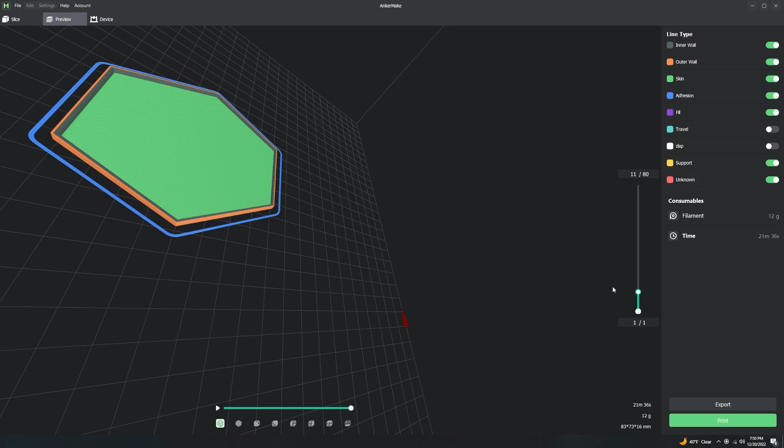So with infill, guys, everything that you're 3D printing is essentially hollow, except the infill is a certain percentage of material on the inside. So if you want 0% infill, what you're gonna get is literally a completely hollow object. There's nothing on the inside. And then guys, come back up here to the slice tab.

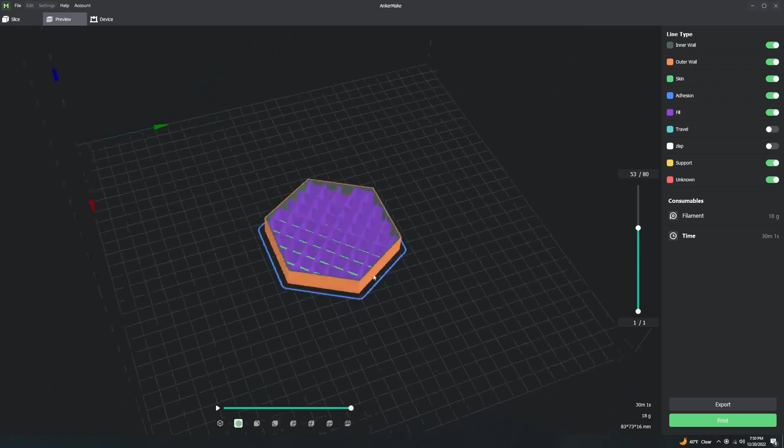If you change this to 10%, what you're gonna see is there is 10% material on the inside of this model, and this slicing software is just going absolutely crazy with me trying to move the camera. But there's 10%, and it's mathematically calculated. It might not look like 10%, but that's 10%.

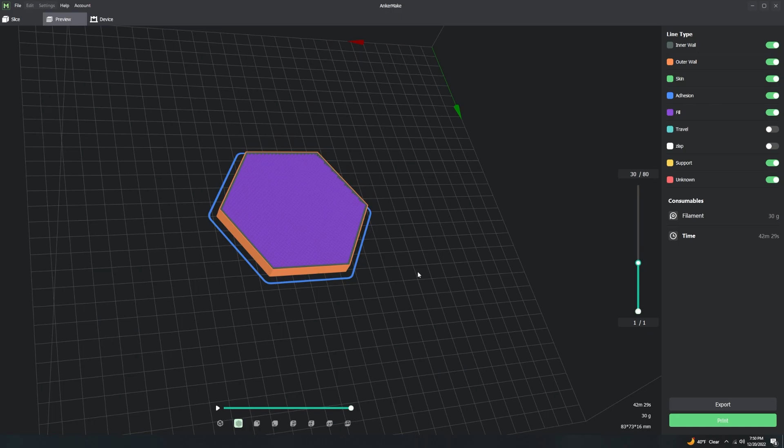So if we come back up here to the top left and we slice now at 30%, this is not gonna look like 30%, guys, but point is, the higher your infill, the more material on the inside of your print you will have. And I'm really fighting the camera here, but I think you understand the point.

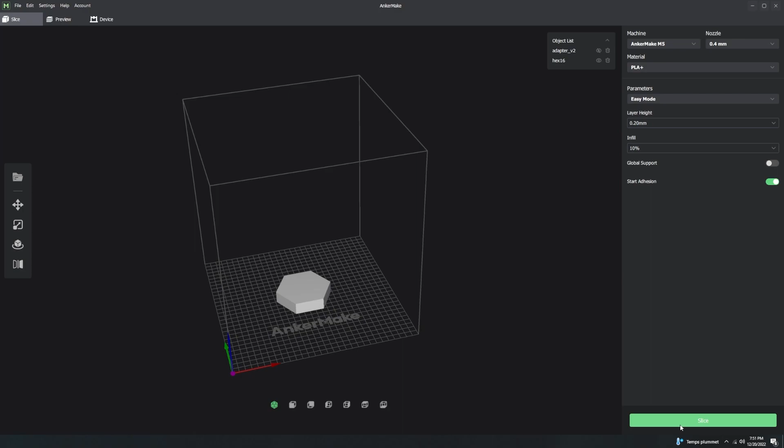So what I want to do is show you guys something cool that you can do to really visualize your model, if I can stop fighting this camera. So go back to slice, and I'm going to put this back at 10%. Now whenever you click the slice button, you're going to get an option over here on the right. That's saying you have 80 layers, and what you're currently viewing is layer 80.

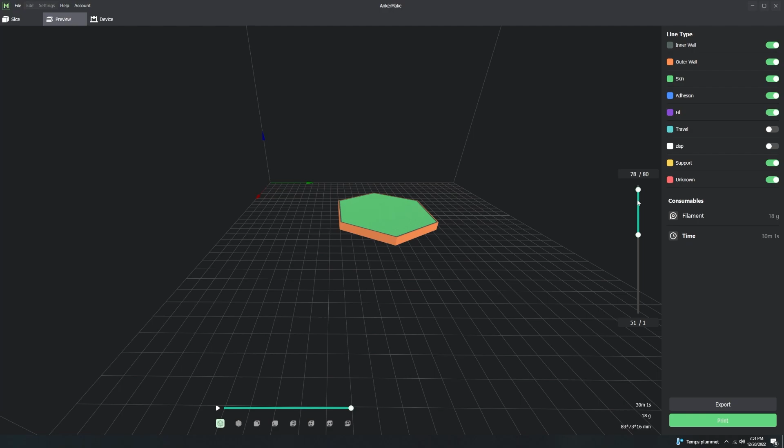If I move it down, what you're currently viewing is layer 79. If I move it down, you're currently viewing layer 78. And also I can move this one up, and then I can click this green bar. Well, it's not letting me do it. However, you can see certain slices of your model, layer 27 to layer 65. Generally you won't do it like that, but you'll just go up, and you'll see what your model looks like on individual layers.

Now guys, you can also stop here, and then if you want to move your camera up, you can come down here and actually click this play button, and that actually shows you a video of what the nozzle is going to do when it gets to this layer.

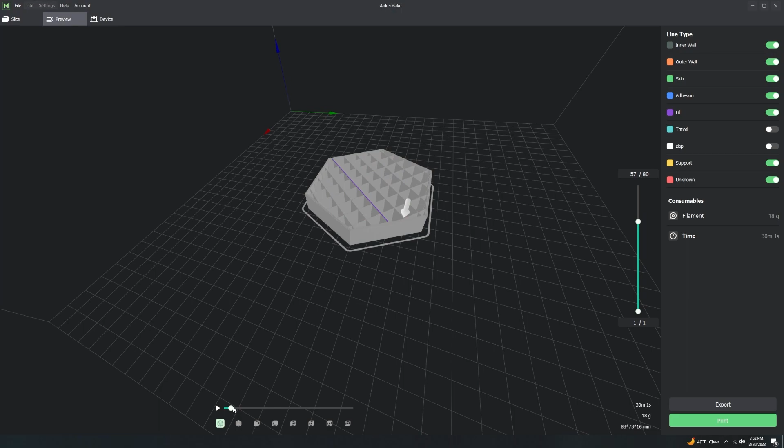And so you can see all these purple lines are infill lines, and all of these orange lines, if you look on the right, they're outer wall lines. You can't really see it very easily, but this line, that's a gray line, that's an inner wall. If I go ahead and turn the outer wall off, you can see the inner wall. If I go ahead and turn the infill off, the infill is still there, it's just not being shown.

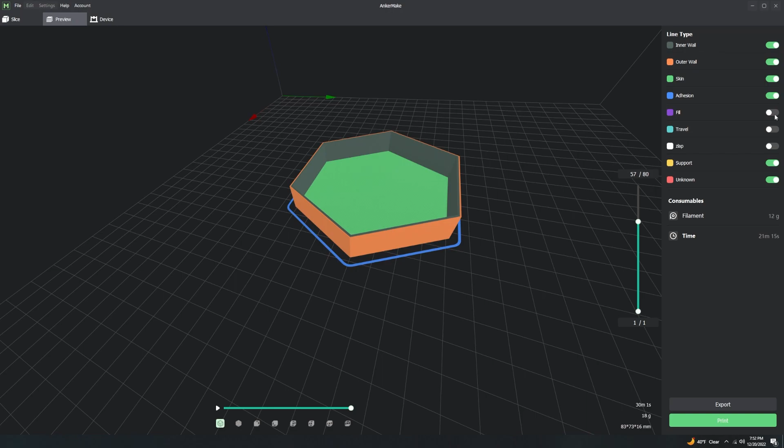Now if I go ahead and I turn off pretty much any of this stuff, guys, it's still there, it's just not being shown. So what we're gonna do is we're gonna go back up here and do slice, and I'm just gonna go ahead and delete that. I'm gonna go ahead and show you guys what global support is.

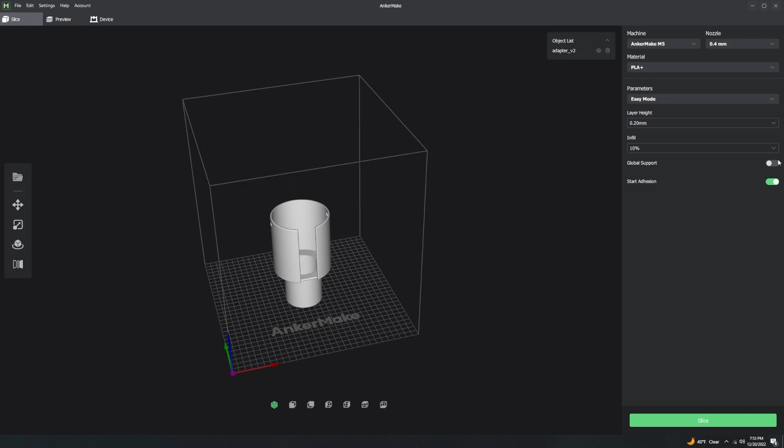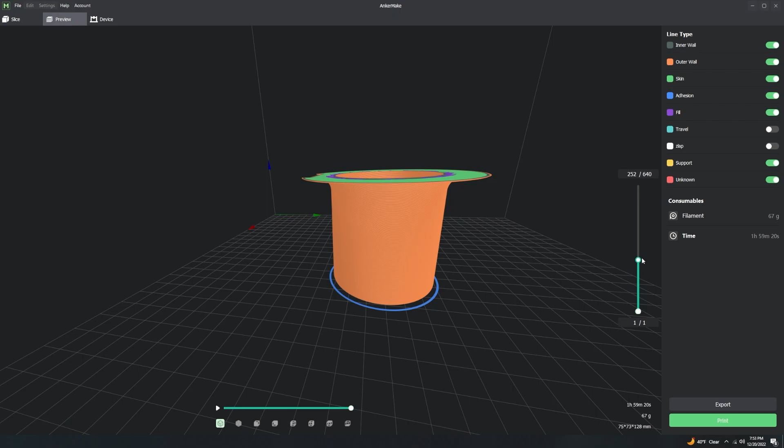So I'm gonna go ahead and slice this without support, and now that I've showed you how to look at individual layers, you're gonna see right about here that the nozzle has to print over thin air. This camera really could be better, but the nozzle is literally printing over thin air right now. That is impossible. So that is what support is for.

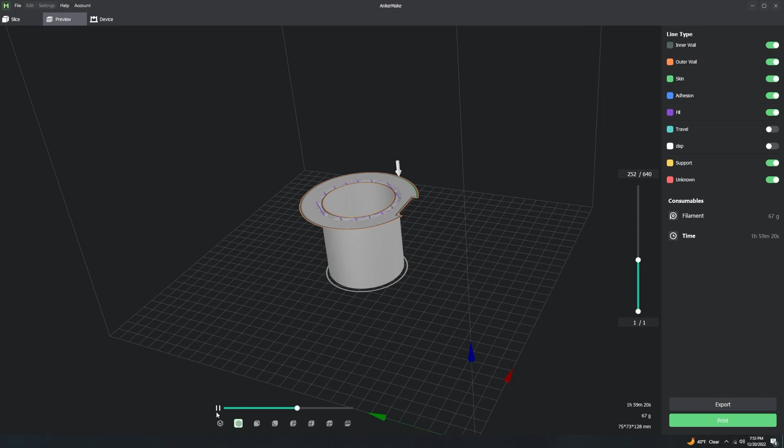I'm gonna go back up here to slice, I'm gonna enable this, and I'm gonna reslice this. What the support is for is it recognizes what is physically impossible to print. No matter how hard you try, you can't do it. This global support recognizes what is physically impossible, and it produces this material on the side. You can see right here, this is support material.

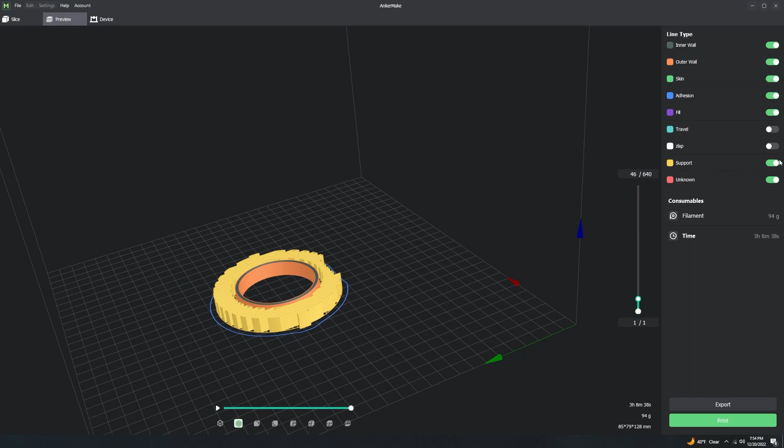It's a throwaway piece of material, so that once it gets to this layer right here, it can actually print it without the material just floating over mid-air. So you can see it's now printing on that support material.

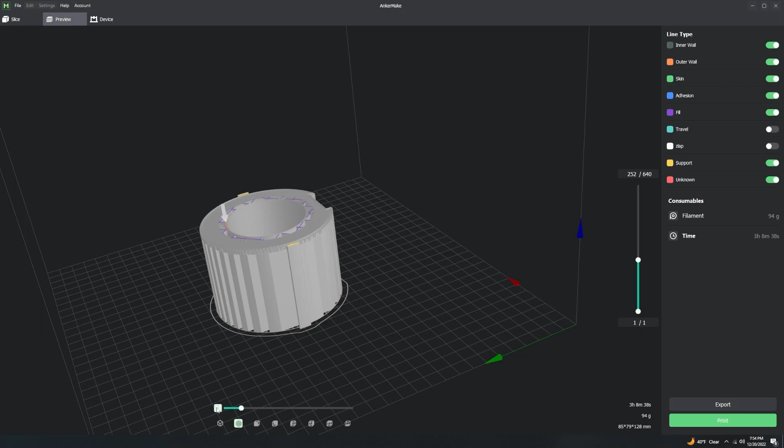Now, whenever the model comes all the way up here and it's done printing, all of this support material that I'm turning on and off right now, you're gonna rip that off of the part and throw it away. It is intended to be thrown away, and there's no way around it. If I want to print this model, I must use support. And so that is what the global support is for.

Guys, generally speaking, you need to have a support on something that has a 45-degree angle, or if it's a 90-degree angle, obviously turn the support on. But pretty much what you want to do when you're learning is just go ahead and turn this off. Go to the slice, and then before you print it, take a moment, look at every layer individually, and see, is there something that's literally impossible?

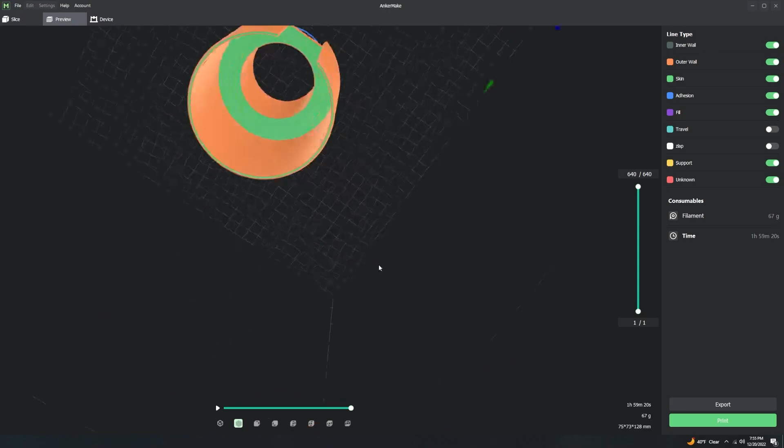It doesn't take that much to really consider what is impossible. Go ahead and drag this down and say, yeah, you know what? That's not possible. I need supports for that. And then you're gonna go back to your slice and just turn it on. But guys, it's just gonna be a learning curve. Put something in. If you think it's possible, try and print it and see if it works. If it doesn't work, you'll remember that for next time.

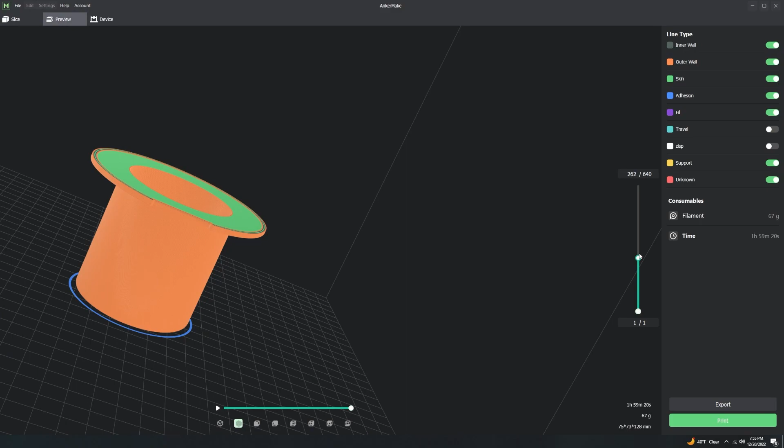Anyway, guys, I've shown you the slice tab, the preview tab, and how to view a model. I've shown you what these different lines are, what the walls are, what the infill looks like. I've shown you how to look at what the actual nozzle is doing.